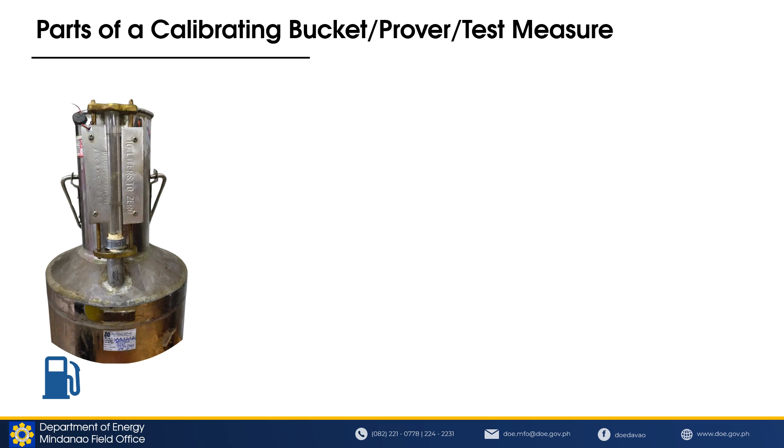Here are the parts of the calibrating bucket. The first two are as follows: the adjustment screw and the calibration seal. The adjustment screw is used to fine-tune the accuracy of the equipment. It allows for precise changes or calibrations to ensure accurate readings.

Next is the calibration seal. It confirms that the equipment has been tested and calibrated. It is placed in the hole below the adjustment screw. The first end of the sealing wire is placed in the hole to meet the other end, and after that it will be sealed. It will be sealed in order to avoid unnecessary or unauthorized adjustments.

The seal indicates the calibration year of the bucket, so for the exact date, refer to the calibration certificate. The graduation scale plate provides the detailed measurement increments for accurate volume assessment and calibration, ensuring reliable and precise readings.

Every calibrating bucket is equipped with a designated serial number for unique identification and easy tracking. Lastly, the calibration sticker is provided by the accredited calibrator together with the calibration certificate.

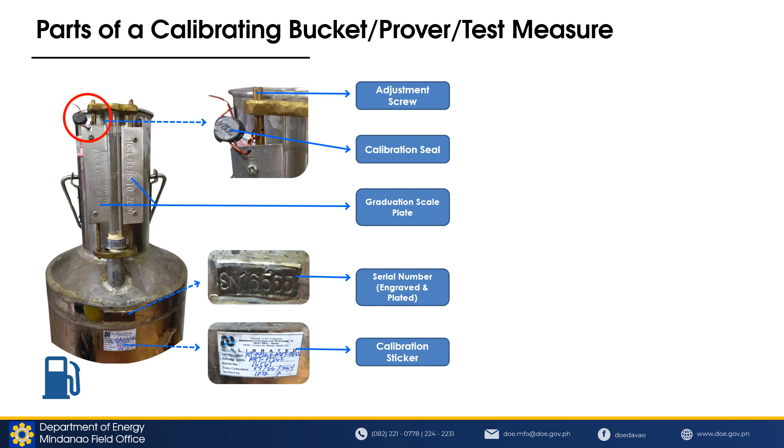The calibrating bucket is designed to hold 10 liters of liquid, which is useful for standardizing and ensuring measurement accuracy in calibration processes. Additionally, the bucket requires annual, meaning yearly, recalibration by a calibrator accredited by the Philippine Accreditation Bureau under the Department of Trade and Industry, whether the calibrator is from the private or public sector.

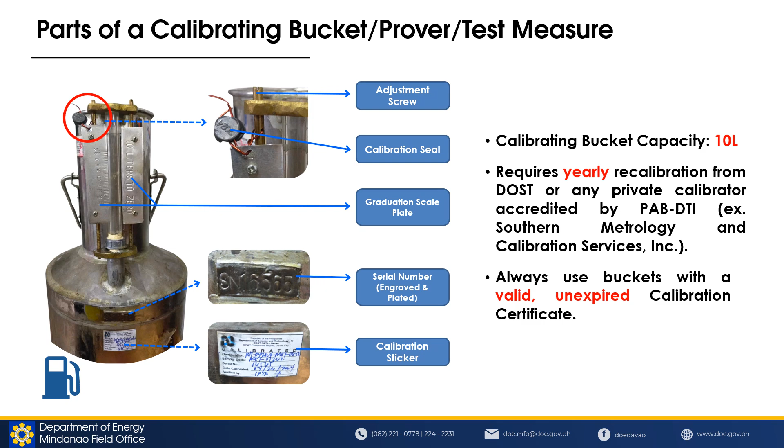Lastly, always use buckets that are valid, with a valid calibration certificate, not an expired calibration certificate, and not a dilapidated or defective bucket.

Recalibration by an accredited calibrator is required if the bucket undergoes repair or is suspected of being inaccurate due to dents, bulging, or other issues.

Therefore, recalibration is necessary not only to address these specific issues, but also to rectify any other problems that could compromise the accuracy and reliability of the fuel measurements taken by the bucket.

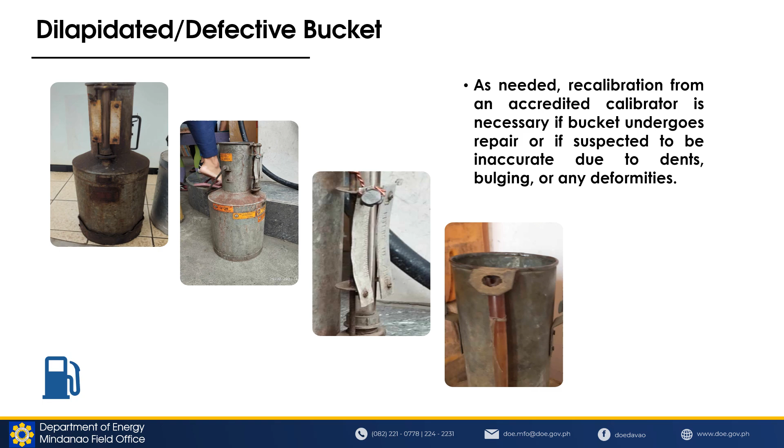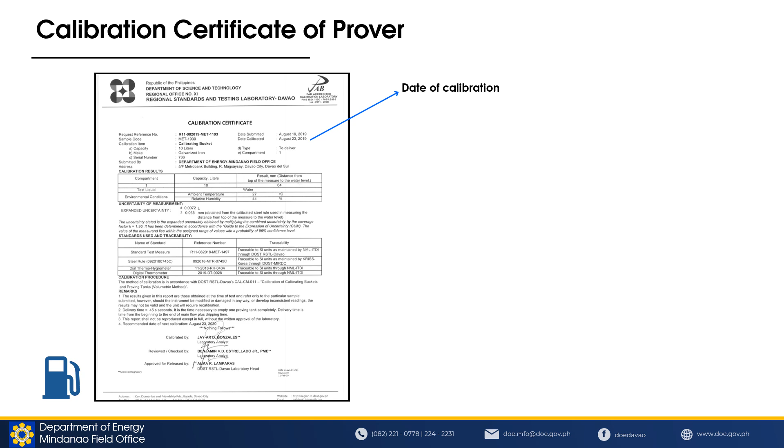The date of calibration: the date on which the calibration was performed. Next is the serial number: it is a unique identifier assigned to the bucket.

The calibrated capacity is 10 liters. This is the maximum volume that a bucket can hold.

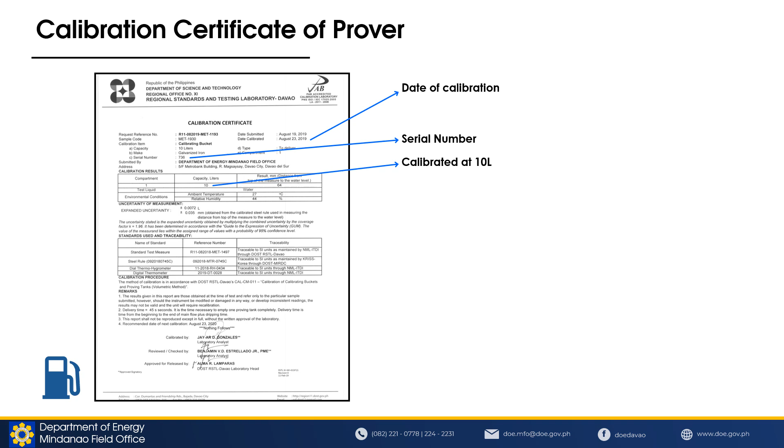In the remarks portion, remarks number 2 indicates the delivery time of the calibrated bucket, and number 4 specifies the recommended date for the next recalibration.

Please take note that each branch of a gasoline station must have its own designated calibrating bucket, test measure, or prover. Borrowing equipment from other branches or dealers is not advisable.

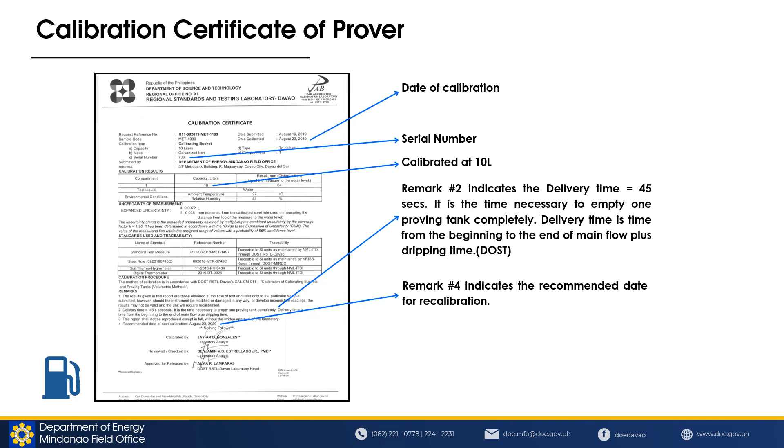Next, we will cover the types of calibrating buckets, based on the material type.

First is the galvanized steel. Second is the carbon steel. And third is the stainless steel.

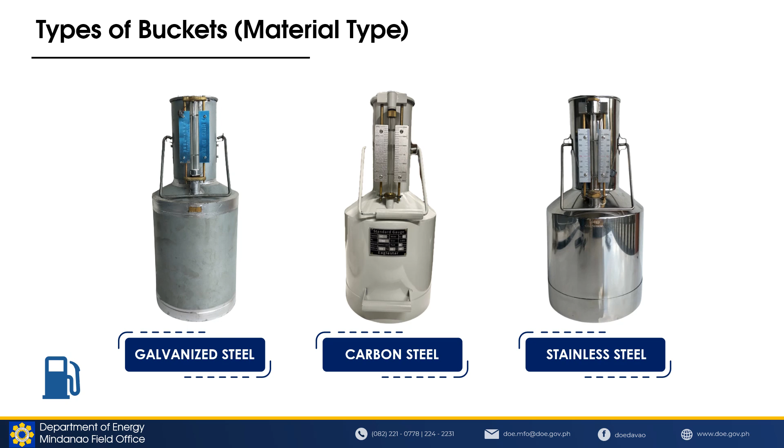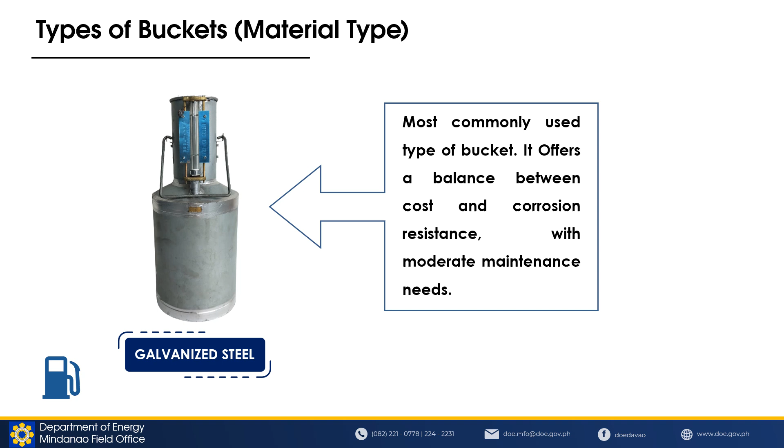Galvanized steel is the most commonly used type of bucket. It offers a balance between cost and corrosion resistance with moderate maintenance needs, making it a durable choice for accurate measurement and calibration in various conditions.

The carbon steel is strong and cost-effective, ideal for precise measurements. However, it is more susceptible to rust and corrosion, so proper maintenance and protective measures are necessary to ensure longevity and accuracy of the bucket.

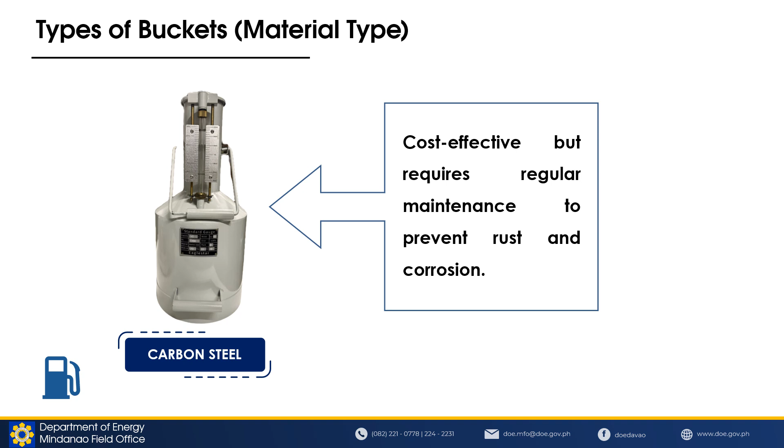The third one is stainless steel. It is highly resistant to rust and corrosion, making it the best material type of bucket, and an excellent choice for accurate and reliable measurements in various environments. Its durability and ease of maintenance further enhance its suitability for calibration tasks.

With these types of buckets, the choice of material you select is what matters.

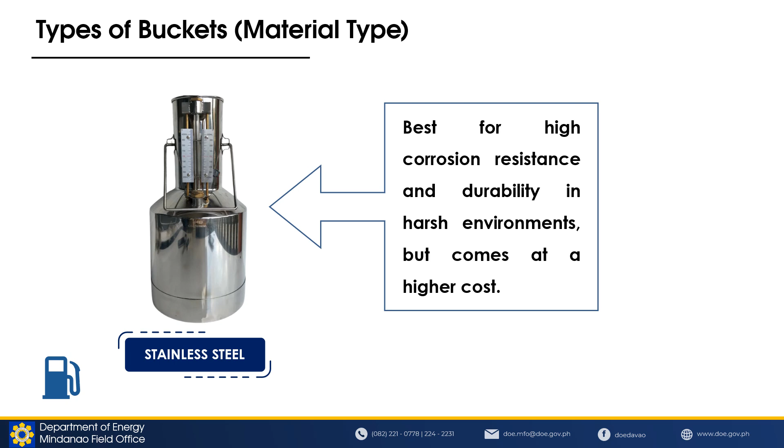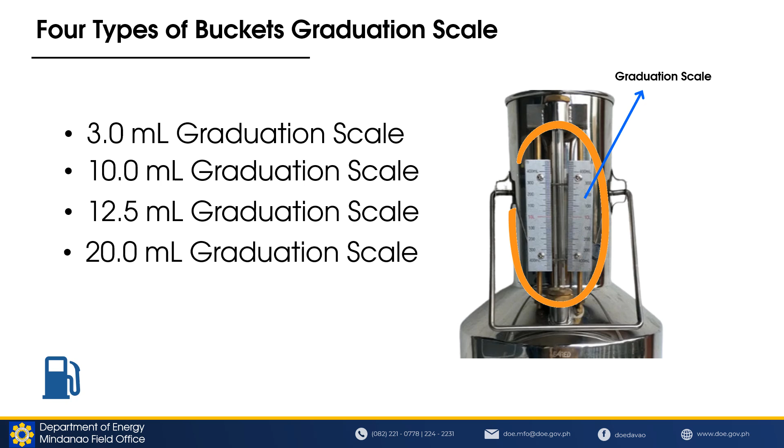Now we'll go to the 4 types of bucket graduation scale. The graduation scale is a measurement marking on a container or bucket that indicates increments: 3 milliliters graduation scale, 10 milliliters graduation scale, 12.5 milliliters graduation scale, and 20 milliliters graduation scale.

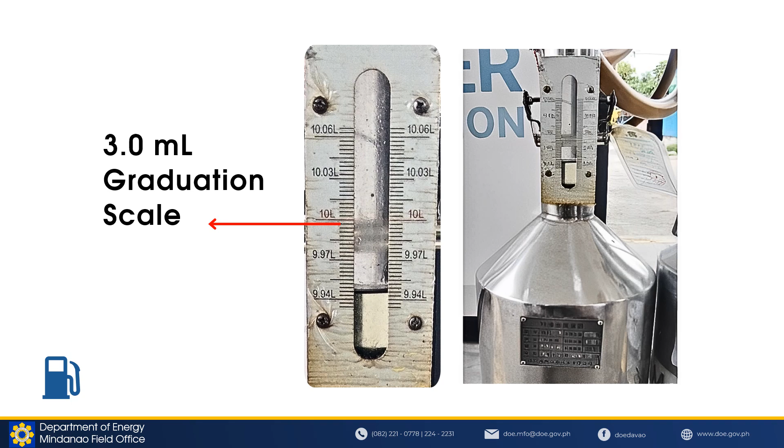This is a sample of a 3 milliliters graduation scale, which provides precise volume increments of 3 milliliters. Next is a 10 milliliters graduation scale that provides volume increments of 10 milliliters.

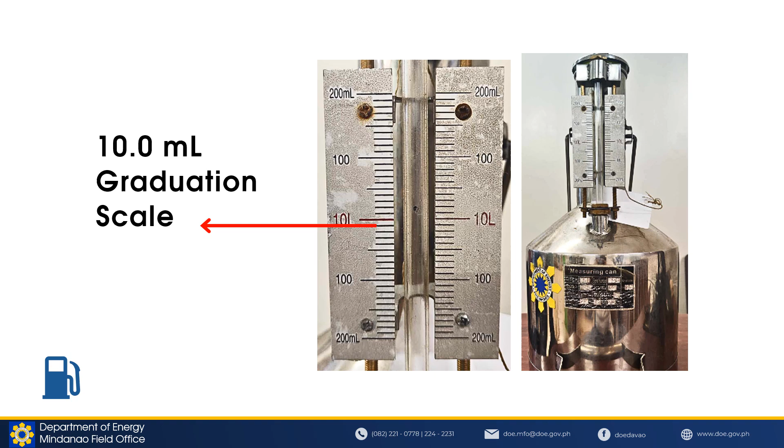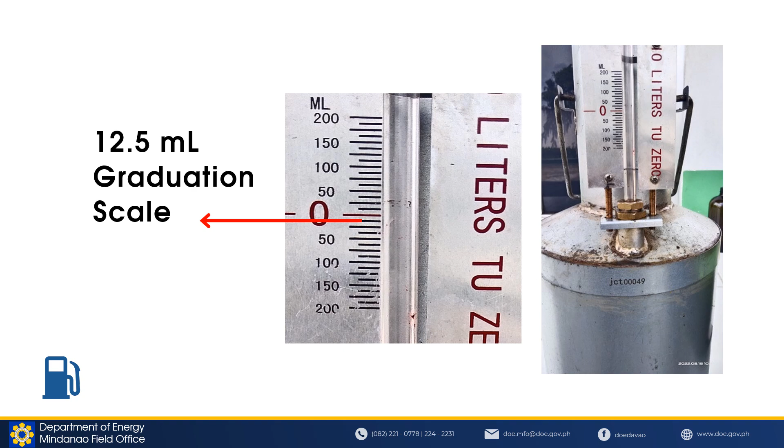The third one, and the most commonly used, is the 12.5 milliliters graduation scale with precise increments of 12.5 milliliters. Lastly, we have the 20 milliliters graduation scale, which provides precise volume increments of 20 milliliters.

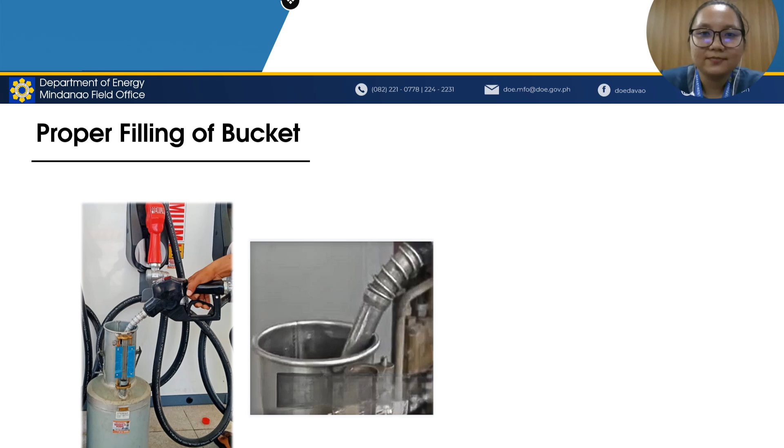Following that, we will discuss the correct procedures for filling calibrating buckets. In the illustration shown, when filling fuel into the test measure, ensure that the dispenser's nozzle makes contact with the neck of the test measure, or the calibrating bucket or prover.

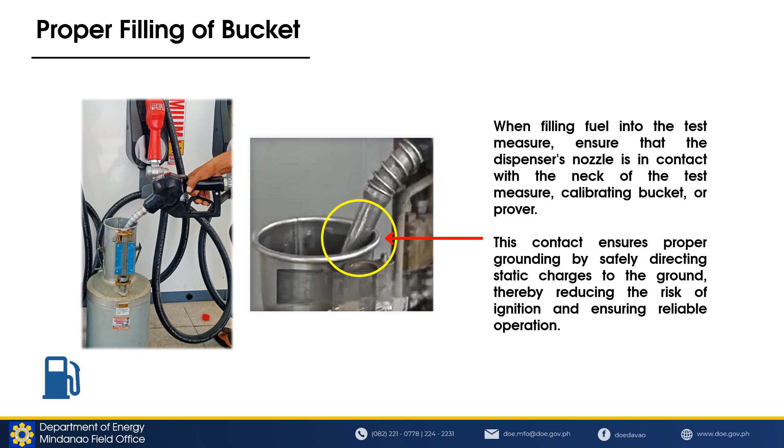This contact ensures proper grounding by directing static charges safely to the ground, reducing the risk of ignition and ensuring reliable operations.

We will then cover how to correctly read measurements from calibrating buckets. To determine the accurate measurements, always read the graduation mark at the lower meniscus.

It's because the lower meniscus reflects the true liquid level, while the upper meniscus can be distorted by surface tension, leading to measurement errors. This is due to the nature of how liquids behave in containers.

Reading at eye level ensures accuracy by preventing perspective errors of the observer. Alternatively, use cards or rulers to provide a clear reference and assist in obtaining accurate measurements.

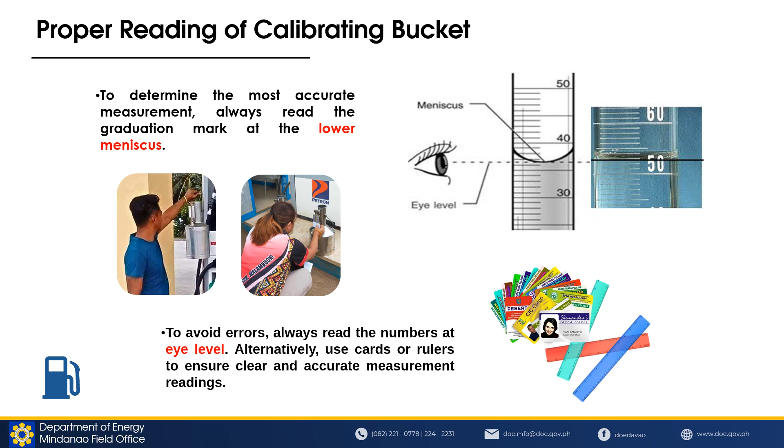Now let's walk through an example of reading a calibrating bucket. The first example is a 12.5 milliliter graduation scale. The level of the fuel is halfway between the 6th and 7th levels below the 0 mark. By multiplying 12.5 milliliters by 6.5 scale, the reading is negative 81.25 milliliters.

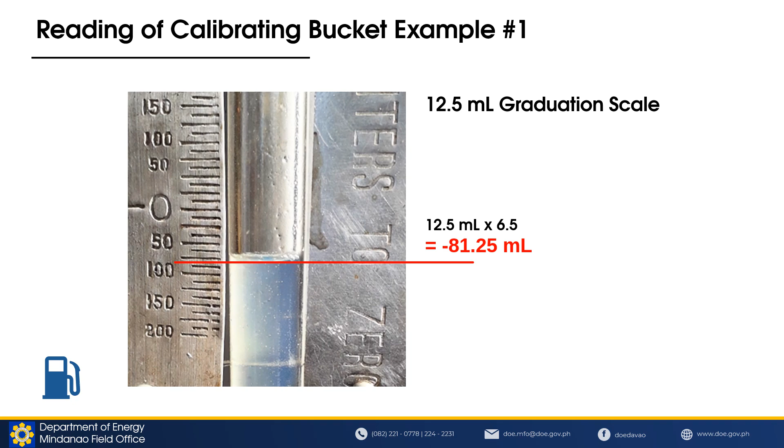Next example is a 3 milliliter graduated scale. The level of the fuel is at the 18th level below the 0 mark. So multiply 3 milliliters by 18 scale. The reading is negative 54 milliliters.

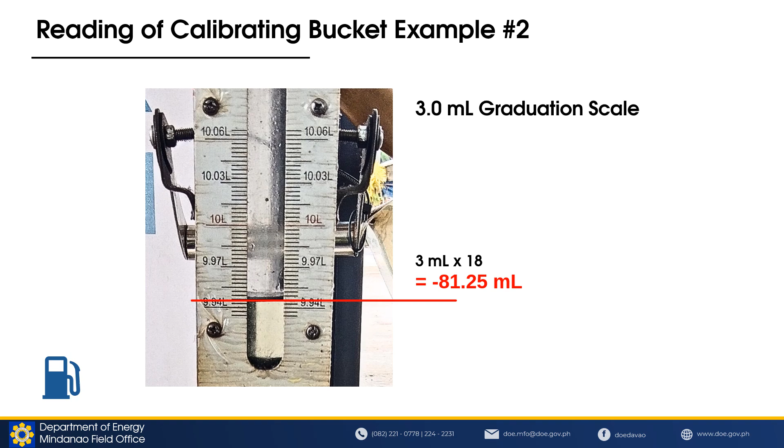The third one is a 10 milliliter graduated scale. The level of the fuel is at the 12th level below the 0 mark. So multiply 10 milliliters by 12 scale. The reading is negative 120 milliliters.

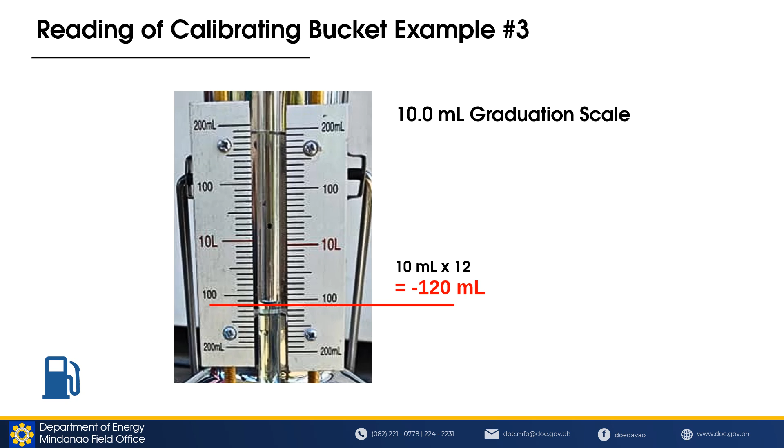All examples shown are read on the lower meniscus because it reflects the true and accurate liquid volume level.

Now, we will move on to the standards and under-delivering that govern the calibration process.

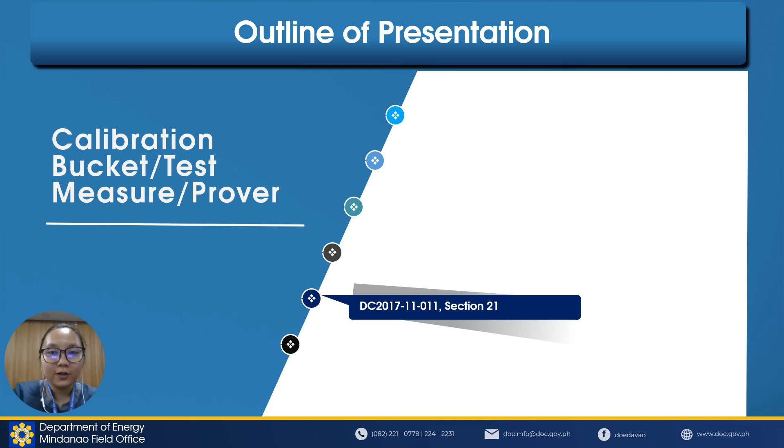Always remember, when calibrating with the prover or test measure, ensure it is at the 0 level or exactly at 10 liters. If it is not, recalibration is necessary because it is the amount the consumers are paying for. Accurate measurements protect consumer interests, ensure regulatory compliance, and uphold integrity of the service.

Under the Department Circular 2017-11-011, Section 21, fuel dispensers must not underdeliver by more than 50 milliliters per 10 liters. So even though there is a tolerance value of negative 50 milliliters, dispensers should be accurately calibrated to measure exactly 10 liters or 0 milliliter error.

Testing involves filling a 10-liter test measure with fuel and measuring it 3 times at various flow rates. These 3 rates are as follows: the fast flow, the medium flow, and the slow flow. So if ever there is already a value of the 3 flow rates, the average of it is the final delivery, and then use it to verify whether the measurement is exact 0 ml or exact 10 liters, or if it shows over delivery or under delivery.

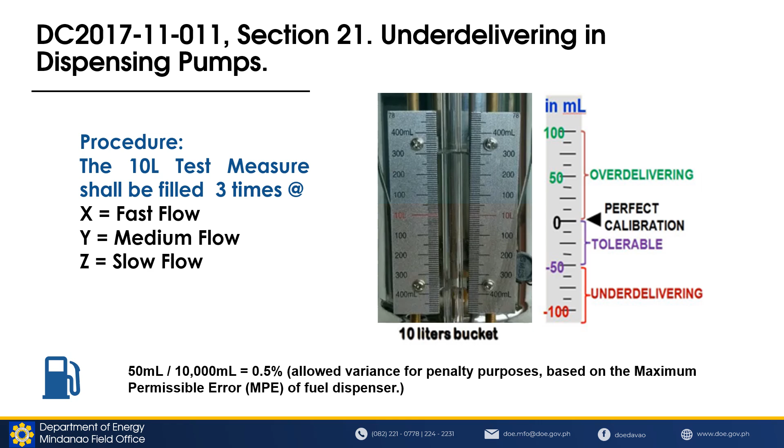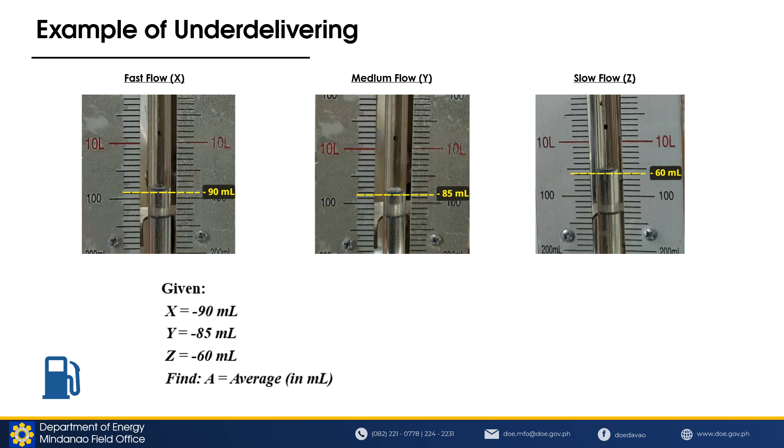Here's an example of under-delivering using a 10 liters graduation scale prover. Let's use variables to represent different flow rates: X for fast flow, Y for medium flow, and Z for slow flow. Now let's substitute the values for each variable and calculate the average. The average is negative 78.33 milliliters, which indicates under-delivery.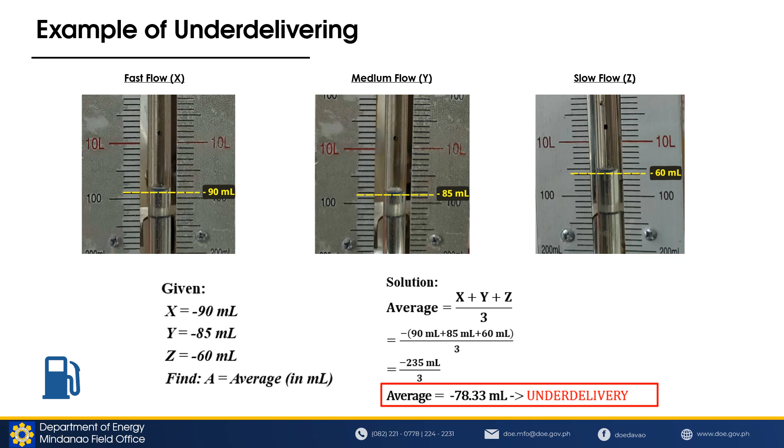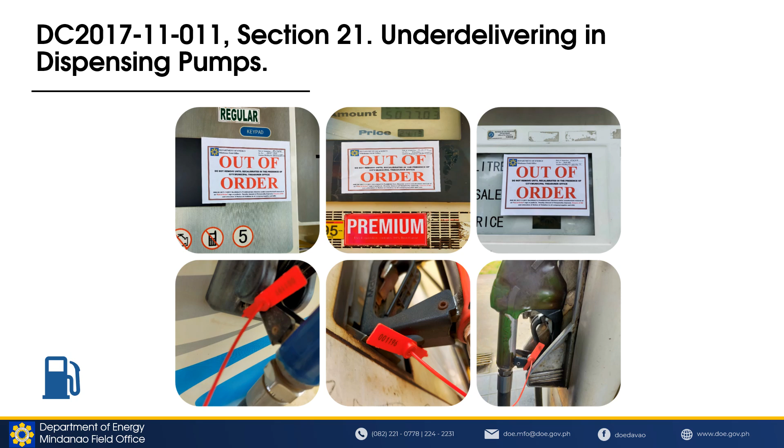So what will we do if there is under-delivery? Number one, we post an out-of-order sign, then padlock or seal the dispenser nozzle to ensure that the nozzle that under-delivers cannot be used until recalibration is completed. Also, an out-of-order form will be issued and must be completed and signed by the Treasurer's Office and submitted to the Department of Energy together with the calibration certificate of dispensing pumps from the Treasurer's Office.

So showing you a sample computation for the gain or loss from under-delivery. The table shows the year 2020 reportorial report from Gingoog City from an independent liquid fuel establishment. The second column shows the sales of fuel product yearly, monthly, weekly, and daily. But we focus on the RON 95, also known as the premium gasoline. The third column is the annual gain and loss per under delivery.

The gain of the player and the loss of the consumer. So what will we do? First, we'll calculate the annual under delivery in liters. Then we'll multiply this amount by the cost per liter, which is 61 pesos, to determine the financial impact.

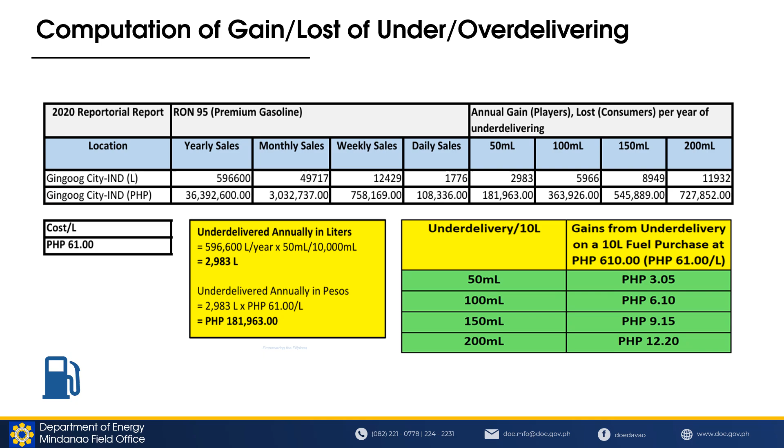Finally, we'll address the proper techniques for emptying calibrating buckets. We are now in the procedure of proper emptying a calibrating bucket. First step, start by pouring the contents of the bucket. This should be done steadily over a span of 30 seconds. This procedure ensures the bulk of the liquid is poured and removed efficiently.

Second, after pouring, allow the bucket to drain for an additional 10 seconds. This step is essential to let any remaining liquid fully exit the bucket, ensuring that no residue is left behind.

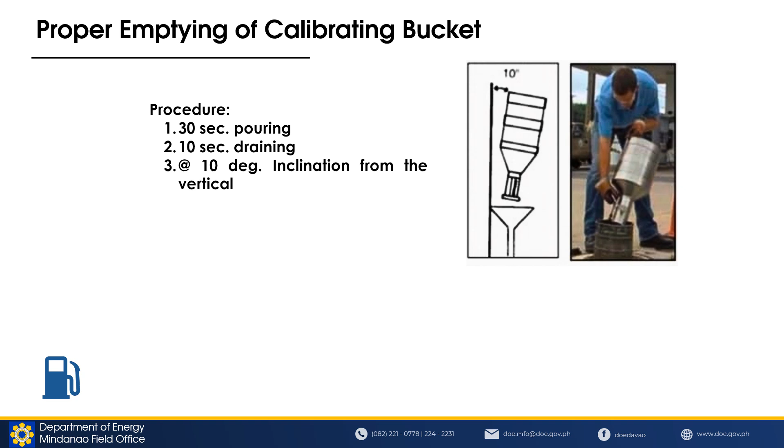Lastly, during both pouring and draining, maintain the bucket at an inclination of 10 degrees from the vertical. This slight angle promotes effective draining and prevents any residual liquid from remaining in the bucket. By following these procedures, you ensure that the bucket is properly emptied, which helps maintain measurement accuracy and operational efficiency.

Next, using a metal funnel is one of the best and safe practices when transferring fuel into an underground tank, enhancing safety, efficiency, and regulatory compliance. Adhering to this practice helps reduce the risk of spills, accidents, and ensures adherence to safety standards.

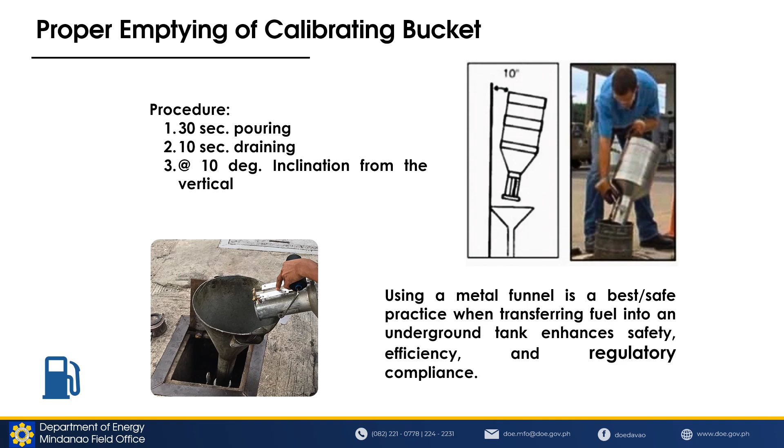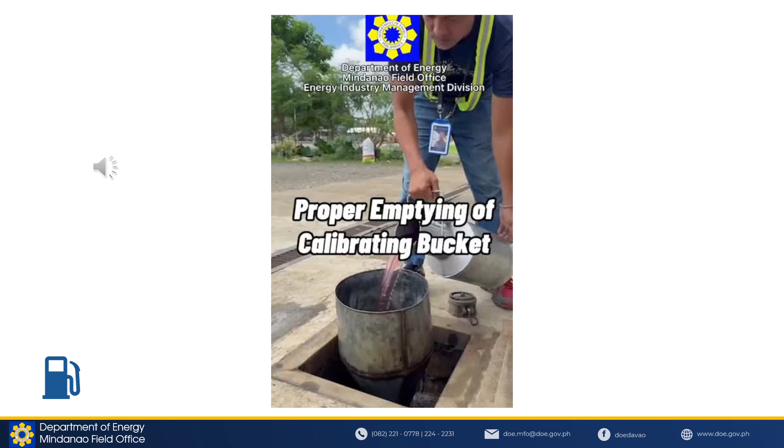Finally, the next slide features a video demonstrating the proper techniques for emptying a calibrating bucket, including pouring, draining, and maintaining the correct inclination. Let's watch it now.

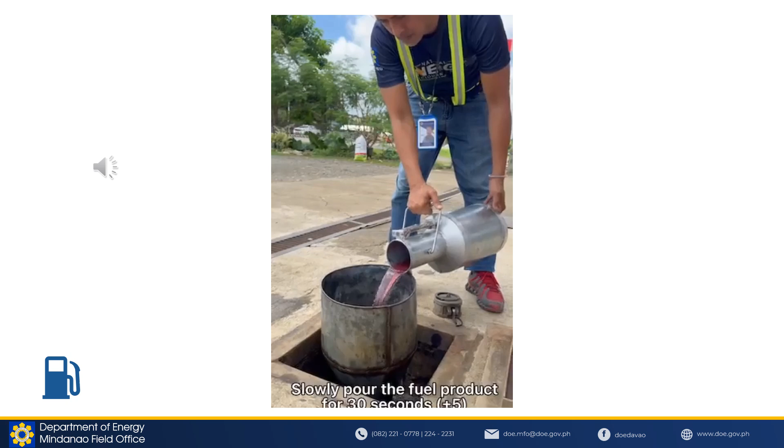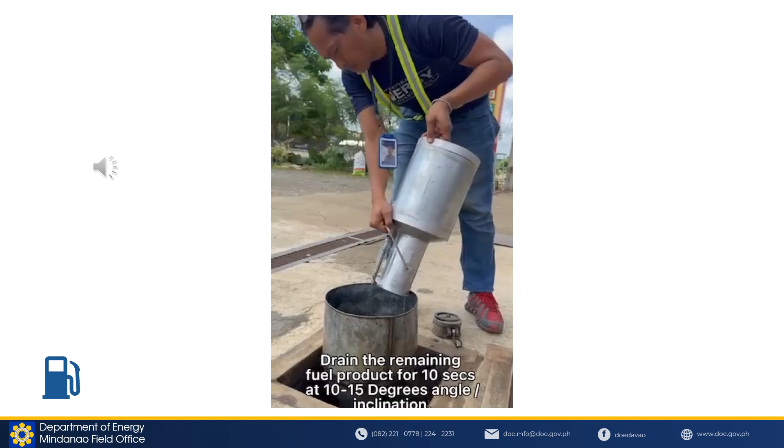To wrap up, we've covered calibrating buckets, including types, handling, and maintenance. Thank you for listening.